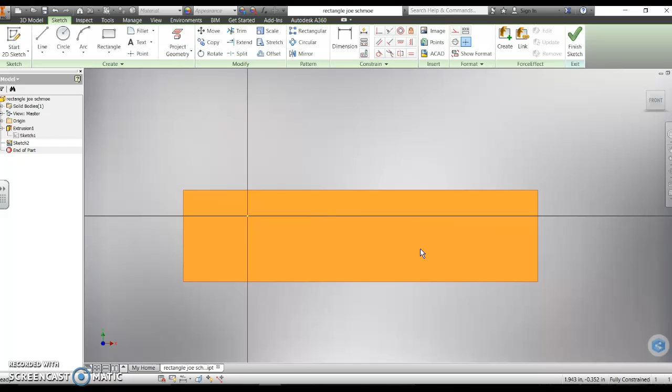When we do that, it comes over a little bit to the right, so I'm going to scoot it to the center. I'm going to get my line tool and place it up at the top. I can tell I'm on the line because the color of the top rectangle line turned.

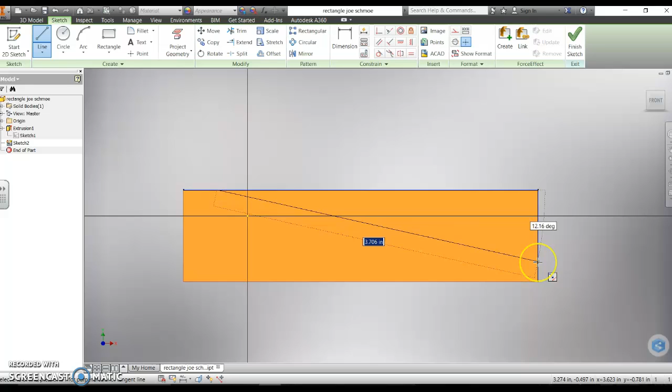I'm just going to estimate how far up and how far down I'm going to stop and start the line. I'm going to click when I'm right here - you can tell I'm on that line. I'm going to right click and click OK.

Now I'm going to go back and use my dimension tool. From the end of my line right here, you can see the red square, click from right here - let me try that again - to right here and pull up. I want that to be a half inch, so I'm going to put in 0.5, hit enter.

From the end of this line right here to the bottom of my part, I'm going to pull it over. It might take a couple tries because it's a little tricky. 0.25, hit enter. Now I have that exactly placed where I want it - a half inch in and a quarter inch up.

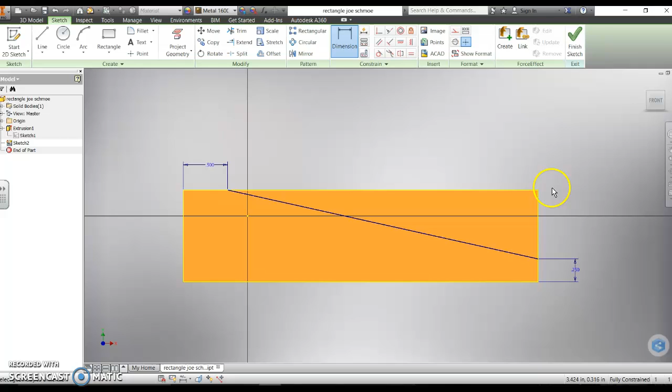I'm going to finish my sketch because I want to go to my features mode, and hit my extrude button, which I've done before.

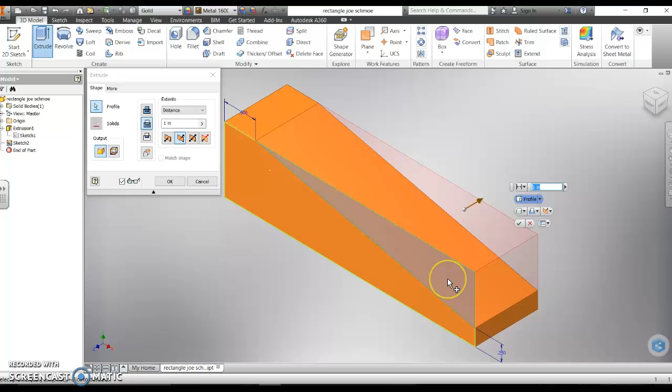This time I'm going to click the cut button, the second one down. I'm going to click cut, and it wants to know what I want to cut. I want to cut this top piece off completely and through. You can see it's telling me it's going to go that way. I'm going to say OK.

Now what I've done is I've created a wedge. I'm going to click to the front, and that's what I have. If I take my view cube and turn it...

Now I'm going to get to the front where I'll make a hole on this front end. So I'm going to click Start a 2D Sketch because I'm adding a new feature, and I'm going to click right here, and that's going to turn it.

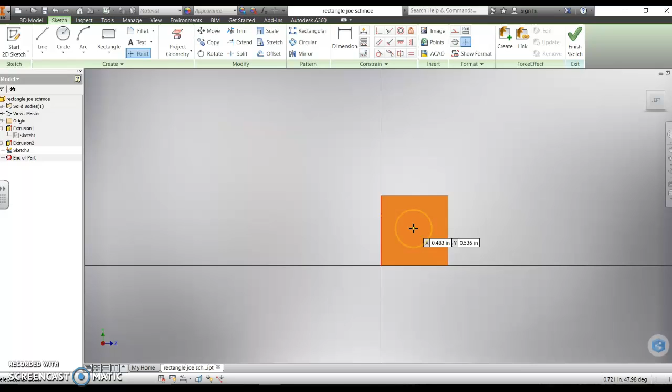What I want to do is find a little tool called Point. I'm going to position this right around here - not exactly right on, but I'm going to click it, and click OK.

I'm going to dimension it again. From the end to the center right here, pull it up. I want that to be a half inch, 0.5, hit enter.

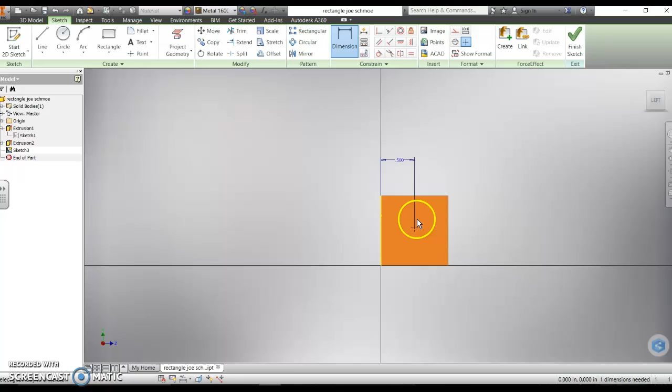Now I've centered it this way, but I need to make sure it's centered from top to bottom. So I'm going to click from my top to the center of the point. And I didn't grab that - I'm going to click out, OK.

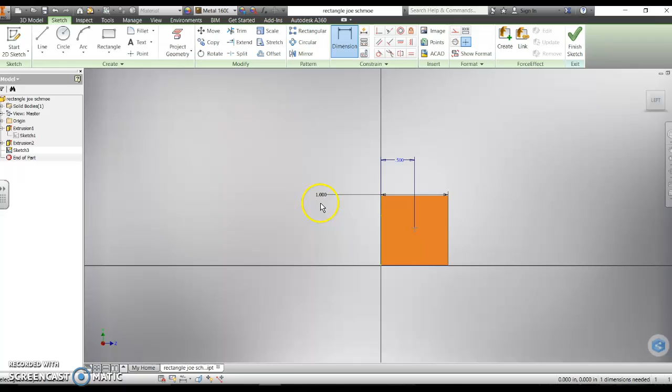I want to hit the dimension tool again. This time I'm going to go bottom up. Click right on my center and out - nope, it still didn't grab it. Cancel that. Let me try one more.

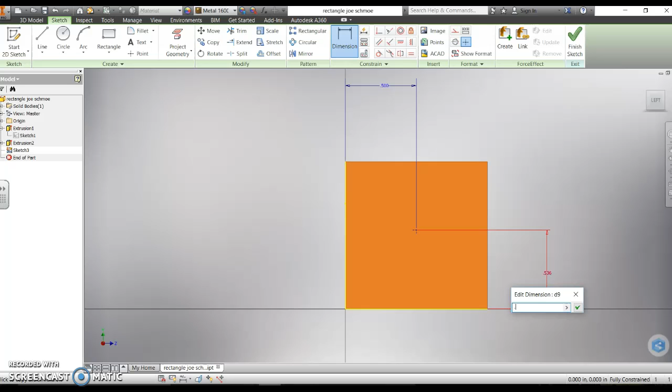Sorry, bring it in maybe a little bit. Go to the center, right down here, out - here we go. Told you it's a little tricky sometimes. 0.5 here. Okay, so now I'm going to finish my sketch.

Bring that back around. I want my left side facing. I'm going to zoom it in a little bit.

This time we're going to use the hole feature. You can see it automatically told you where it's going to put it, because that's right where my point is. I want it to be a drill point flat at the end, because I want it to be a square bottomed hole.

I want it to be a distance - yours might say to, or through, or all. We want this to be a distance, and we want the depth to be 1 inch and the diameter to be a quarter inch.

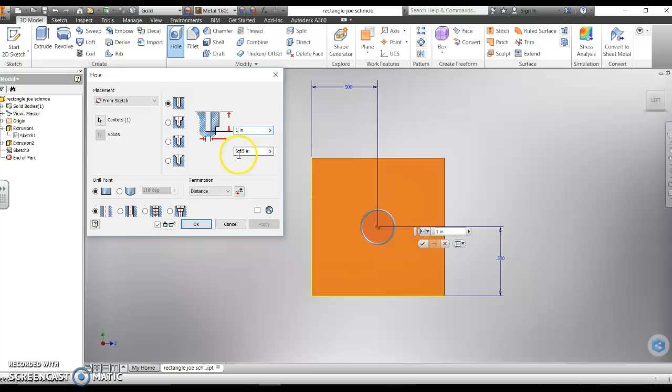In the future, you might have to change this to be a half inch or other dimensions, but for right now that is exactly where we want it. We want it 1 inch in and a quarter inch around the diameter, and click OK.

Right now you don't see much until you bring it around, and there you see your hole. So that's what you have for your parametric modeling exercise.

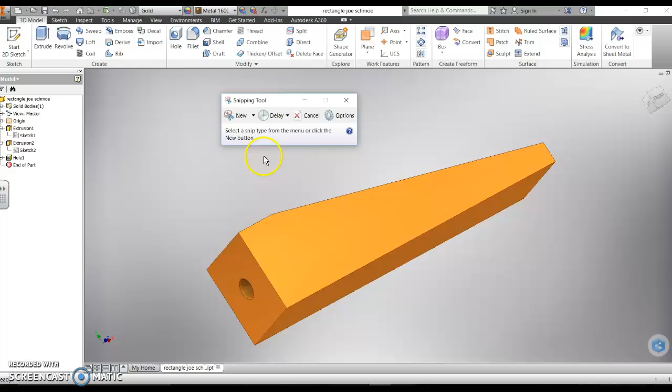I'm going to cancel this right now. I want to take it to the home. I'm going to take this a little step further.

Let's say you want to edit the first sketch. Let's say I made a mistake and I only want this feature to be 2 inches. I can go in here and edit this 2 inches.

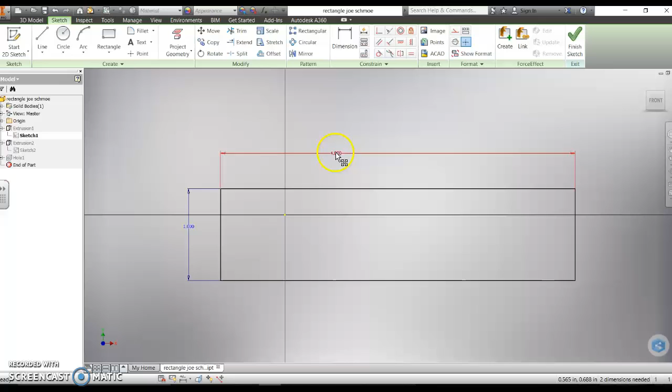Now watch - it follows through. It actually shrunk my part. So there are some things you can do to play around with and learn.